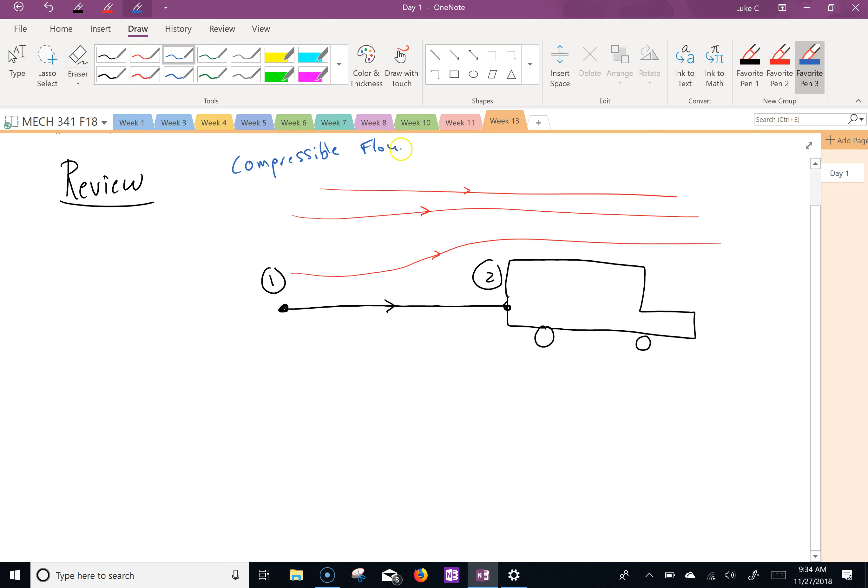Really, you can spend a whole semester on this stuff, but what we talked about, and we can label it over here, was isentropic flow. We talked about converging nozzles, and then converging-diverging nozzles. We'll quickly review all these.

And then we started looking at the shock waves, right? We got the momentum down, but we'll kind of look at those. So these are the basic ideas of compressible flow, and if you understand these, if you ever get more into this field, this is the basics. You can definitely understand everything else.

So we also talked about any type of flow - here's the flow going over a truck. From 1 to 2, the actual flow will actually slow down, and it will eventually approach 0. What are those properties called when they bring a fluid to rest? Do you remember? Stagnation. Stagnation, okay.

So you can have stagnation temperatures, stagnation pressures, densities. The first homework problem is to plot that ratio between the stagnation temperature, T naught, to the upstream temperature. I'll just give you the temperature one. What do we have right here?

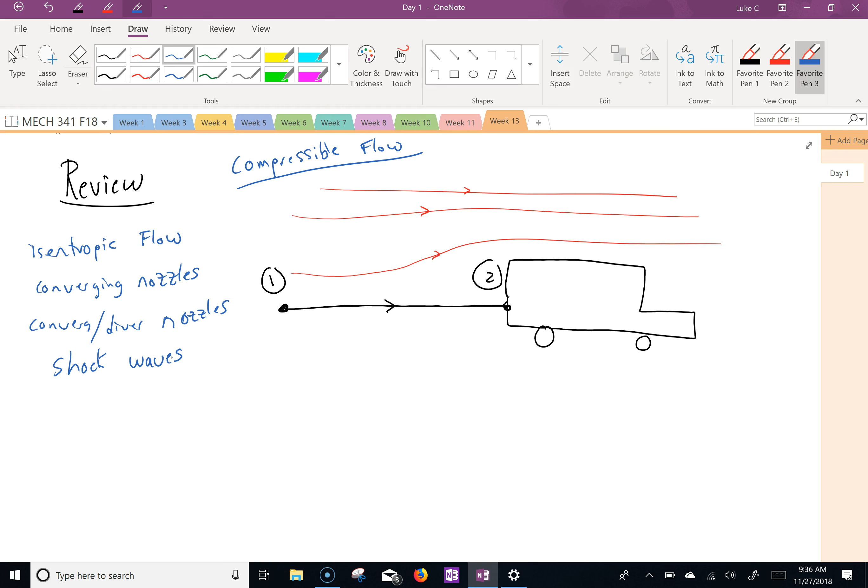So the stagnation temperature was T plus V squared over 2Cp. This is just basic, actually using enthalpy. Remember what enthalpy was? What variable is that? H. Yep, H. So if you remember from thermo, H, or delta H, is Cp delta T. We're using a lot of thermodynamics in this for intermediate - they all kind of mesh together now.

So we use this concept here. If you ever want to know what the temperature rise would be in front of your car, if you put a temperature sensor there and you had a temperature sensor out in the world not moving with it, you would see that the temperature sensor at point 2 would be slightly higher. Because you're bringing that fluid to rest, it's got to do something.

So when an airplane is flying really fast, the front part is going to get really hot. That's a main reason why they have to design these, because you're bringing that fluid to rest, and it's going to increase your temperature, especially if you start going almost Mach, because this number gets really big now, and this temperature difference is going to go up.

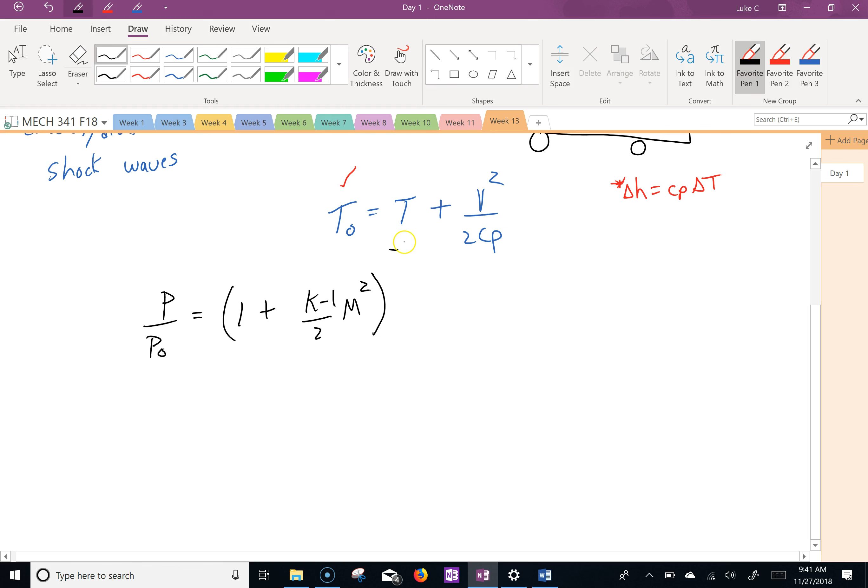One-dimensional isentropic stagnations. Okay, so this is basically what I want you to plot: P over P naught equals 1 plus k minus 1 over 2 times M squared, raised to minus k divided by k minus 1. And the density ratio is 1 plus k minus 1 over 2 times M squared, raised to minus 1 over k minus 1.

Oh, am I recording? Yeah, good. And the temperature one is this one.

And are we using air? Yep. So do you remember what the K value was for air? Do you remember what the equation for K was? You didn't give us these. Did I give you those? Yeah, I don't know. Oh, okay. Okay, that's all right. Good review.

Okay, so go back to K. Remember the number for K or the equation? Did I give you the number in there? For K? Yeah, 1.4. Yeah, 1.4. That number is found in the back of the book. This is for air, and I believe it's CP over CV, if you ever want to know that. I think we did that in thermo. You should have that in your thermo notes. I think Alyssa has it in that over-exaggerated binder that you probably should duct tape.

And you can plot these three right on the same graph, okay? And try using... I think you'll get, I don't know, let's say you have 3 lines. They might do this or something. I don't know what they exactly do.

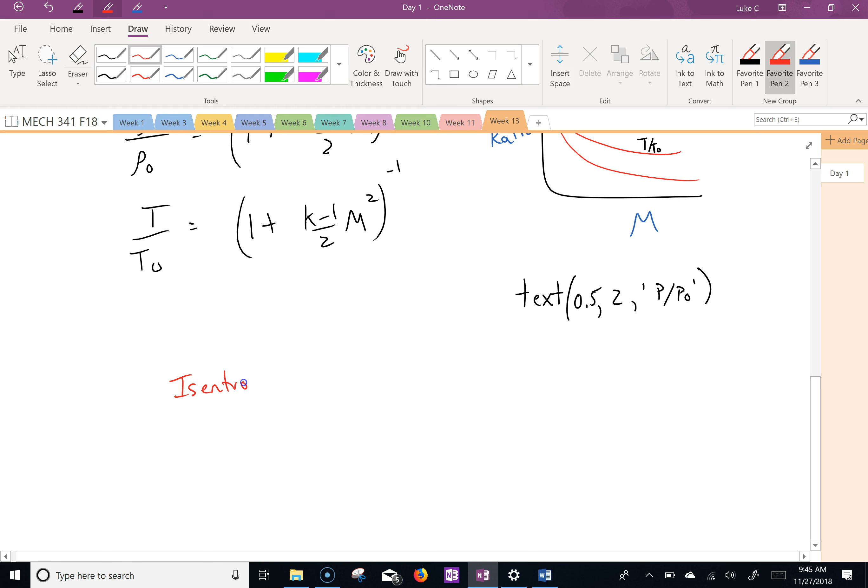Isentropic. So we talked, actually the students in thermo yesterday, see if they remember this. What did we talk about yesterday in thermo? Yes, we did that. After that, we talked about the Carnot cycle.

Entropy. Good job, Will. You weren't there yesterday, but you remember from a year ago. That's good. So entropy. So we looked at Q over T plus S gen. Yes, that's right. Good. Okay.

So this is actually the second law of thermo, an actual equation that states that entropy will always increase. Why? Because everything in the world has some sort of friction or irreversibility that we can't get back. Take a soda can that's hot, put it in a cold room, okay, the heat is going to leave, it's going to go out. We cannot get that heat physically back unless we put it in a mechanical object to cool it. So that's what that means.

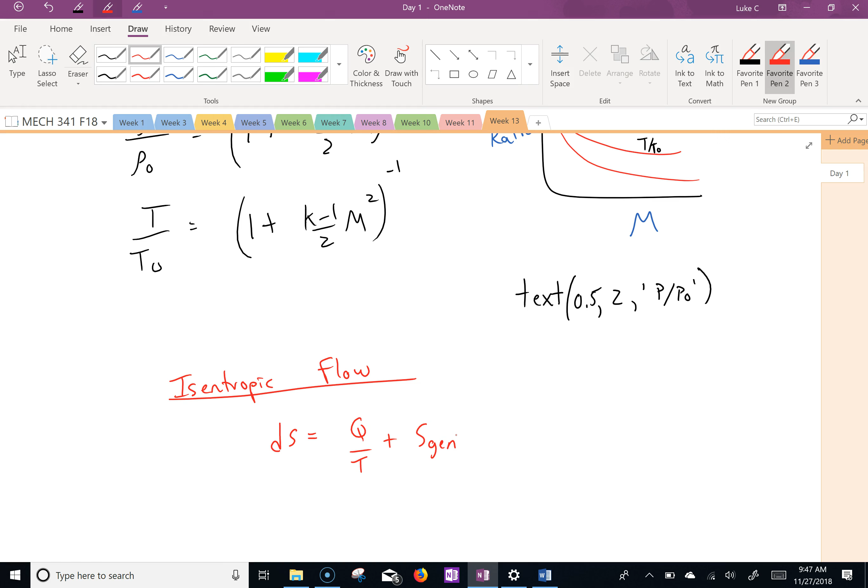But when we deal with isentropic flow, what does delta S equal? Do you remember? Yes. So delta S for isentropic flow is 0. Meaning that this type of flow is an ideal case. We're assuming that we can get that energy back somehow, but we know we can't. But it's just an ideal case, okay?

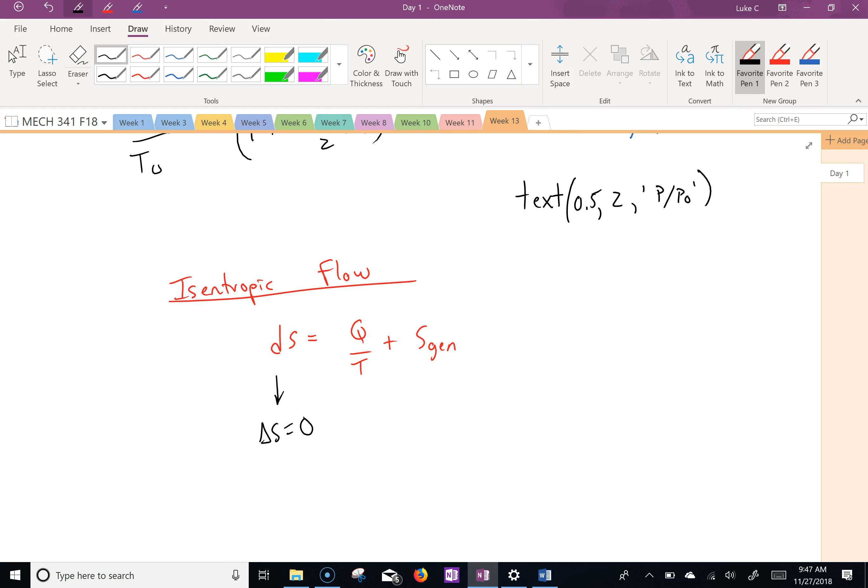So that means this is isentropic flow. It's adiabatic, which means the system is kind of insulated, and reversible.

Now, what does adiabatic mean? It's insulated, meaning no heat transfer through the boundary. But what about the internal energy, delta U? It could do whatever, right? Because think about it, temperature changes inside a fluid duct, if we take that as isentropic flow, is because the internal energy changes, not Q. Remember, Q is heat through the boundary.

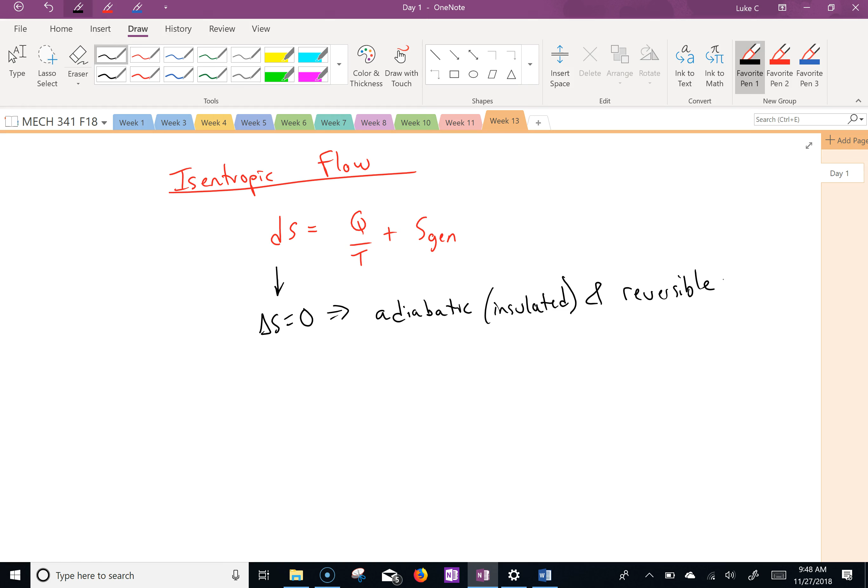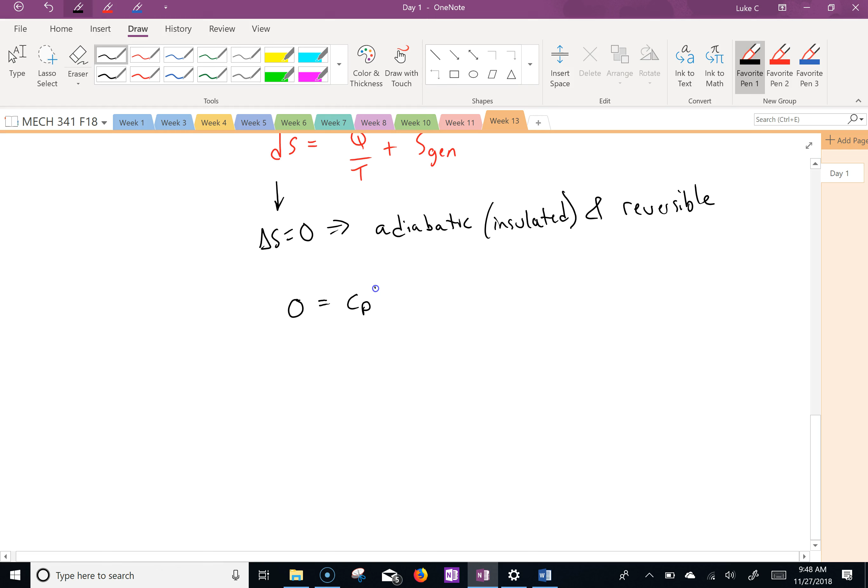So we use isentropic flow, meaning delta S is 0, assuming it's adiabatic and reversible, meaning there's no friction losses, whatever. It's an ideal case. We can do that, and we can actually figure out, I'm just going to give you one equation. We do this in thermo, students have taken thermo, you've done this. There's a whole bunch more algebra I don't want to show you, but I'm going to give you this. You can use this idea to get relationships between temperatures, pressures, densities, you name it.

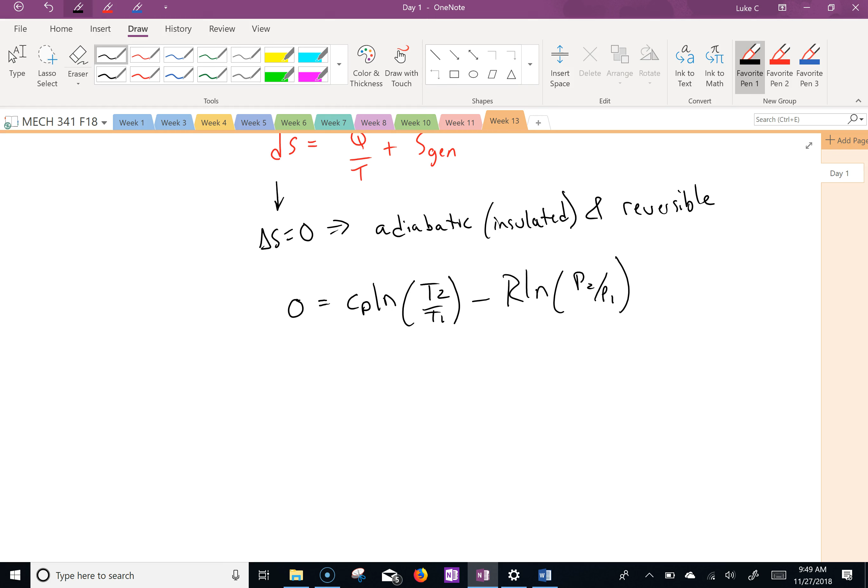So if we have flow in a pipe, and the flow's going that way, it's air, we can figure out what the temperatures and pressures are at any point, if we use isentropic flow.

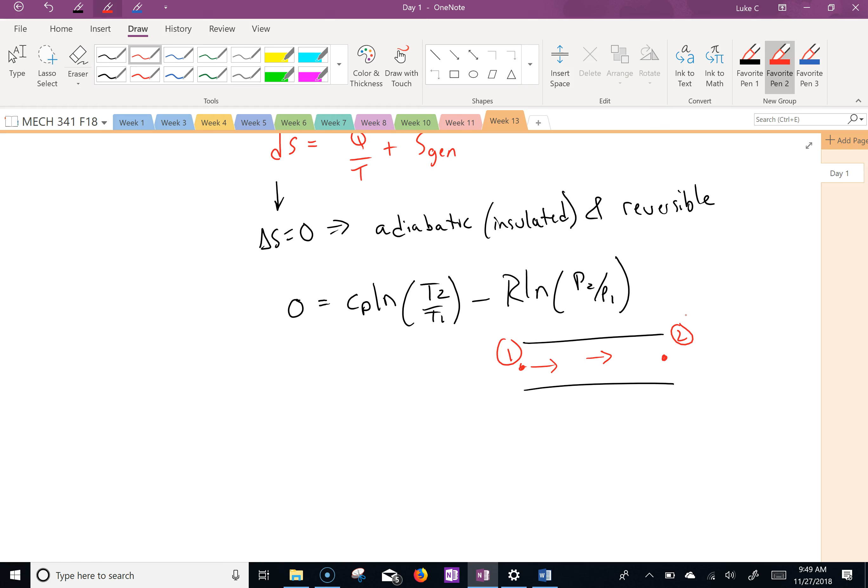So this is a good transition. Now, if we have a pipe and we have somehow magically got a shock wave in here, right here.

What is a shock wave to begin with? It's some abrupt change in density, pressure, temperature that occurs, if you somehow get that. Actually, the easiest way to think about it: if an airplane's flying faster than the speed of sound, you're going to get a shock wave. That shock wave is basically due to, if you think about it, when you have signals being sent out at the speed of sound to let the flow ahead know to move for you, and it's receiving that back at the speed of sound, but if you're going faster than that, it doesn't know what to do. Boom, you get the shock wave.

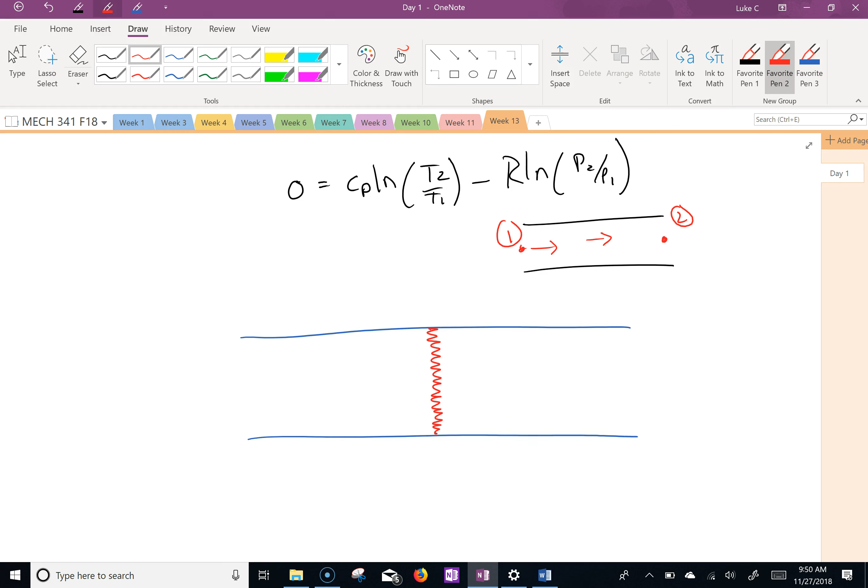So it's weird inside flow because shocks can occur, and it's all based on the back pressure back here. So the flow is actually going left to right here. Depending on this pressure way back here, you can move this shock in this tube wherever you want. It's pretty crazy. So basically you have Mach greater than 1 here, and then it becomes subsonic on the right side. That's how shocks work.

What kind of shock wave is that? Do you remember? Normal, yep, because it's perpendicular, yep.

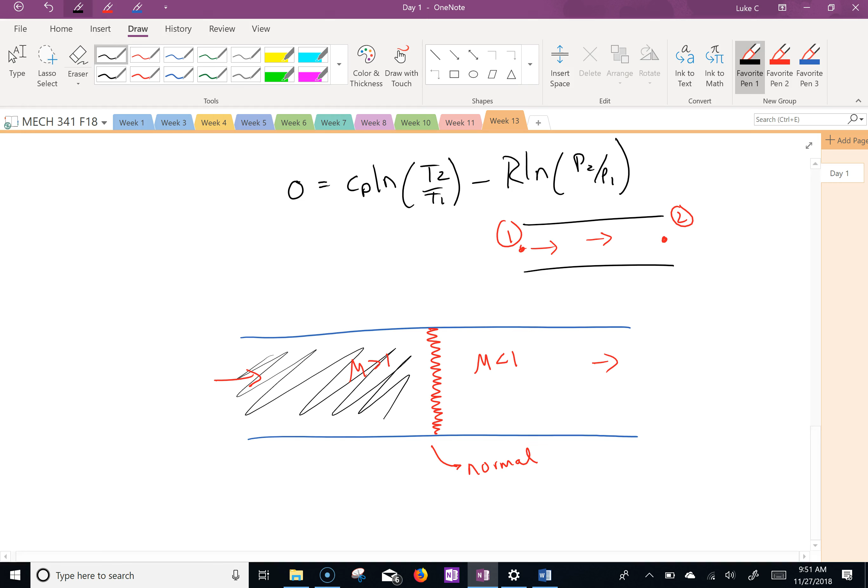What can we assume the flow is in this black region to the left of the shock? Yeah, so we can assume that the flow over here is isentropic. And what about the flow on the right side? You can, still assume isentropic. But you can't do it over the shock because there's an abrupt change. So that's why we use isentropic flow to make our life easier to figure out what's happening up here and what's happening back here.

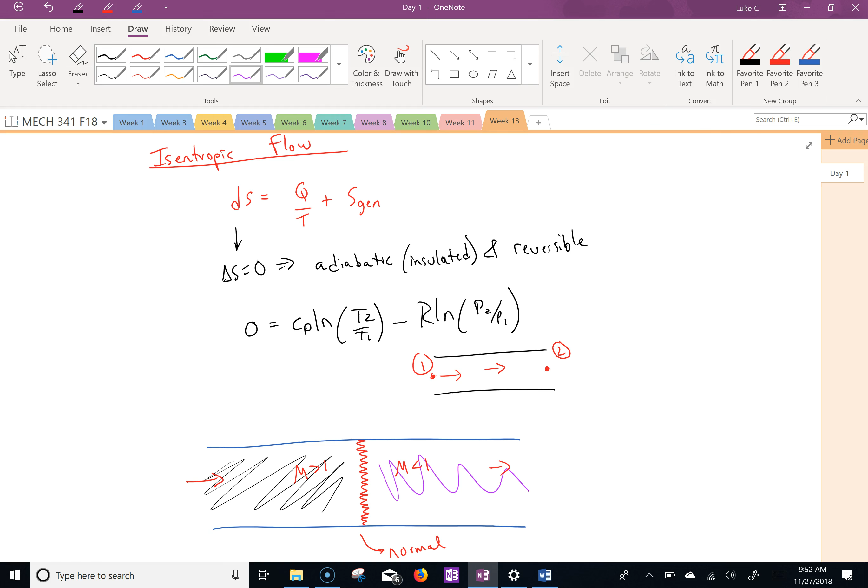So really, anytime you hear flow in air, we usually use isentropic flow. Same thing with gases, we use the ideal gas equation, right? Well, now you're dealing with fluid mechanics, air is moving or a gas is moving. Typically, a lot of the times, we can assume it's isentropic flow. Makes our lives easier.

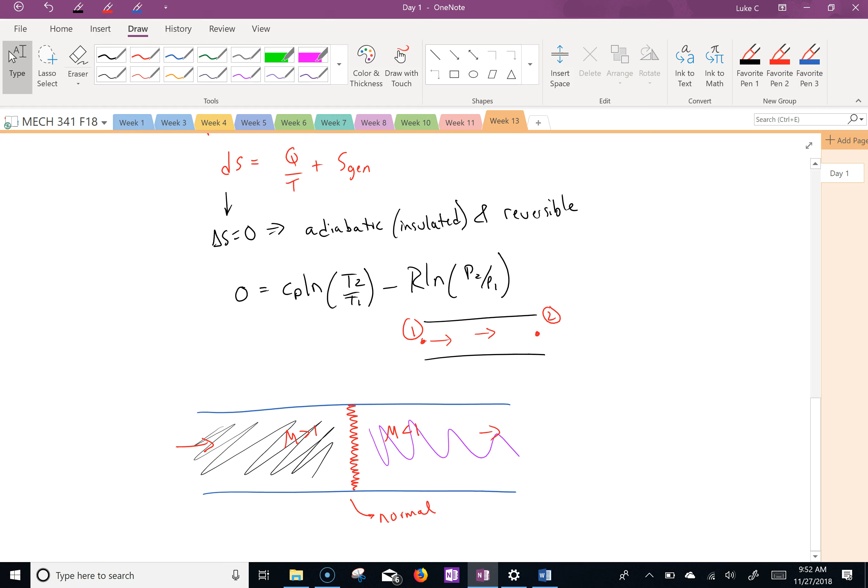Okay, so before I get to the normal shocks, we looked at the converging nozzle. So say we have a pressure back here, we'll call it PB. What's going to happen to this if we keep dropping this pressure? What's going to happen to the flow inside that nozzle? It's going to start increasing, right? It's going to start increasing, and then the max is always going to be right here at the throat, right?

What's the maximum velocity you can get right here at the throat? Mach 1, which is the speed of sound, right. So you can drop this pressure to 0, and you're only going to get Mach 1. Because it goes back to the speed of sound sending out signals, and it can't receive it back fast enough.

So, do you ever see rockets designed like this? Not ones that really want to go fast, right? So what they do is they do a converging, diverging section. Whoops, that's a weird looking one.

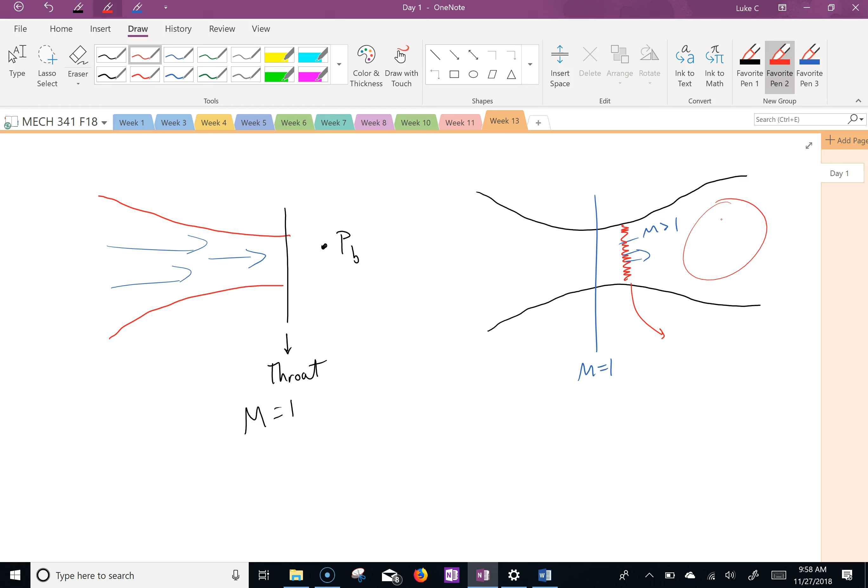Okay. Yeah, I like that. It might be—I'll think about that some more. Thank you, Dan.

Okay, so let's go back to shocks. What we did is we took a control volume approach, right? In order to analyze what happens between upstream and downstream of this, we take a control volume of the shock, and what did we apply? What equations—do you remember?

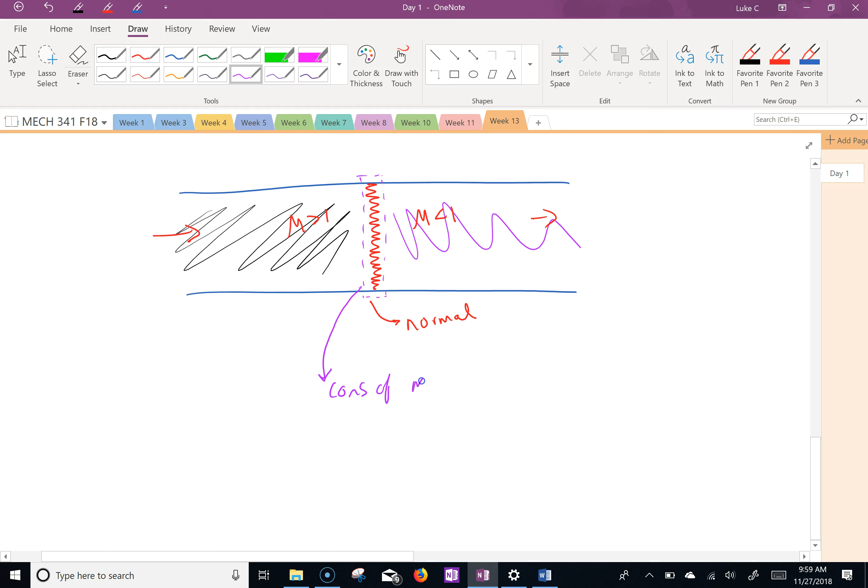What did we do in our paper? Continuity, yep, and momentum—one more that we didn't finish, but we started, maybe. Force. So we did conservation of mass, and we did momentum.

So what does conservation of mass tell us? M dot in equals M dot out. And that's in this control volume, right? So if I have—let's make it brown here—that's coming in, and that goes out. Mass is always conserved no matter what, okay?

What does momentum tell us? What's... M V1? Yes, but what is m times velocity, or m dot times v? What is that, like unit-wise?

Which is? If you have m dot times v, what's that? Force. It's a Newton. So what does momentum tell us?

Forces. So what are the forces acting on this that you had written down? Remember, the sum of m dot out minus m dot in. So you have the force of the fluid pushing in, pressure on this side, and then m dot times v going out and pressure pushing that way. So the forces here are your m dot times velocities and pressures. And we did those two.

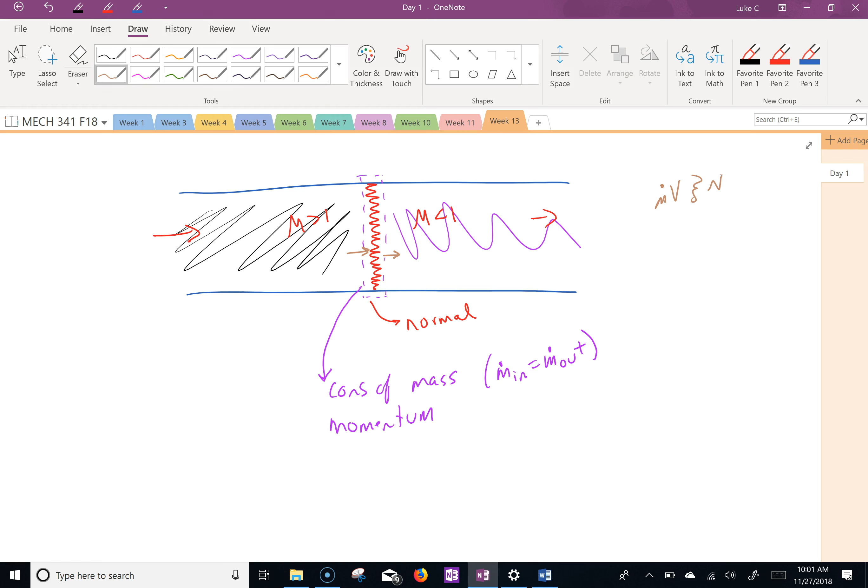So with these two, you can find relationships between velocity and pressure. And what did we have for those equations? Let's write those down.

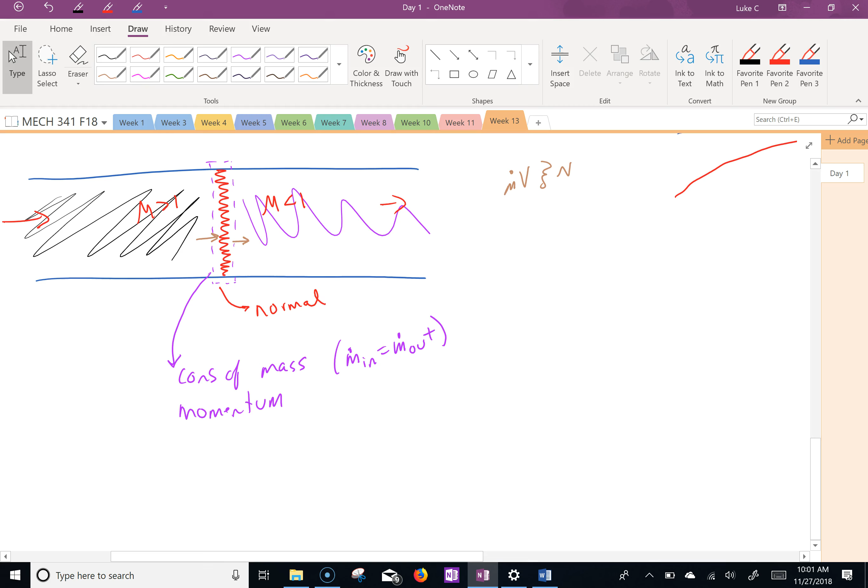So for the conservation of mass, we had rho 1 u1 equals rho 2 u2. I believe, right? Is that what we had in our notes? We actually called what we did in continuity, right?

So what is the continuity equation? What's the difference between that and when I say conservation of mass? It has to deal with u's instead of A's and rho's.

They'll deal with the same thing. But what is the continuity equation that we wrote down? Oh, it's equal to 0. It's still conservation of mass, but in what form? Yes, it's differential form.

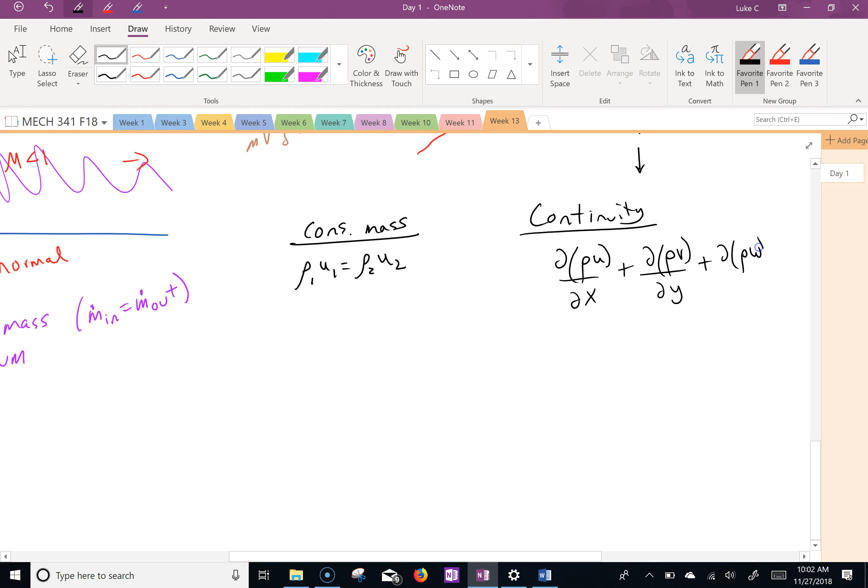And we wrote this down. So when someone says conservation of mass, you got to actually ask them back, what are you talking about? Differential form, or are you talking basic m dot algebraic form? You get the same answer, and we did both. You'll get the same ratio when you do this.

And then momentum. So when you have momentum now, let me write this down. We had what? P1 minus P2 equals rho 1 U1 times U2 minus U1.

What about momentum? What are the two ways you can look at it that we've done in the past? Remember this? We did the, what was the problem? When we started looking at the spigot and the water shooting out, what did we use to solve for the external forces on that?

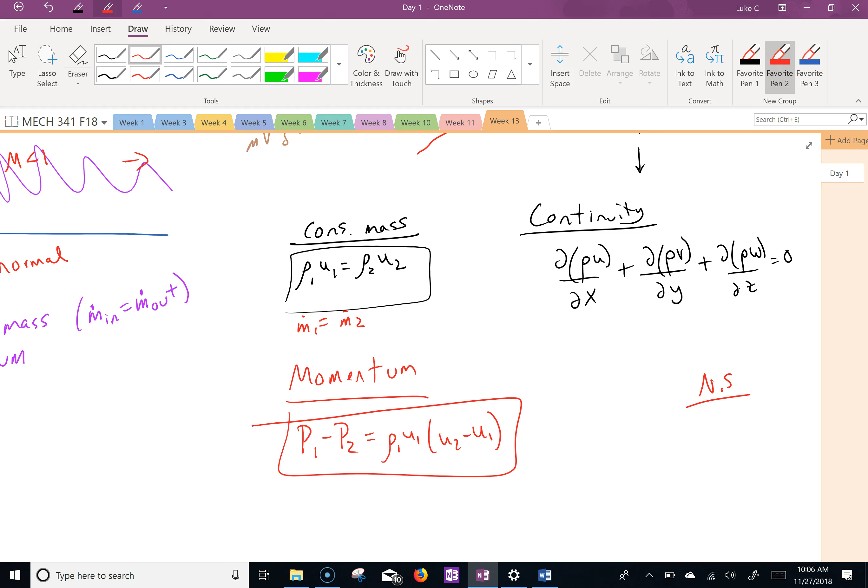And this is where we left off. So, energy.

Isn't it crazy how so much you've learned we can now put together? And you forget so much. Yep, that's why studying for your FE is really good, because then it brings back everything and then it helps you actually in advanced classes too.

So use conservation of mass and momentum to find relationships between pressures, forces, speeds. And the energy, actually, you could use altitudes, velocities, and temperature.

So what can we cancel in this? What can we assume about the control volume for Q? It's the same, just assume adiabatic, so that's gone, zero. There's no change in elevation. And is there any mechanical work? None. Any other object? None.

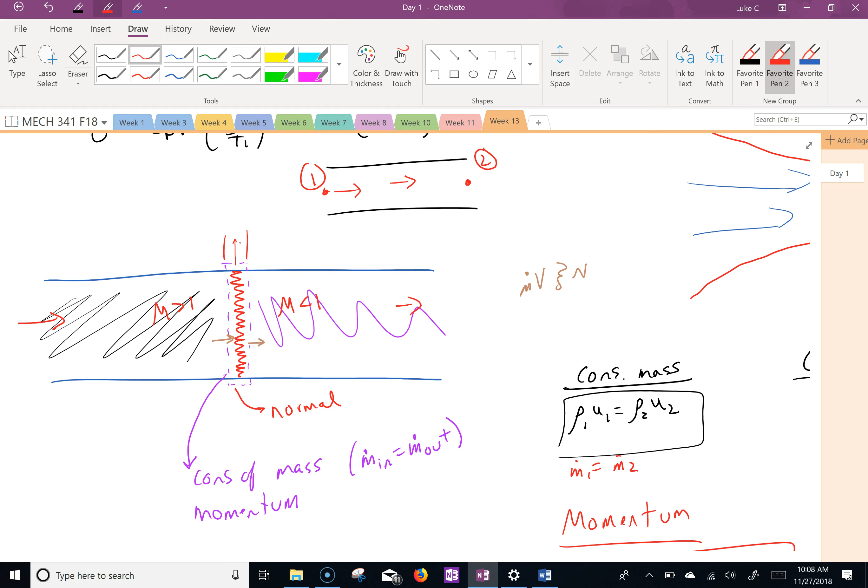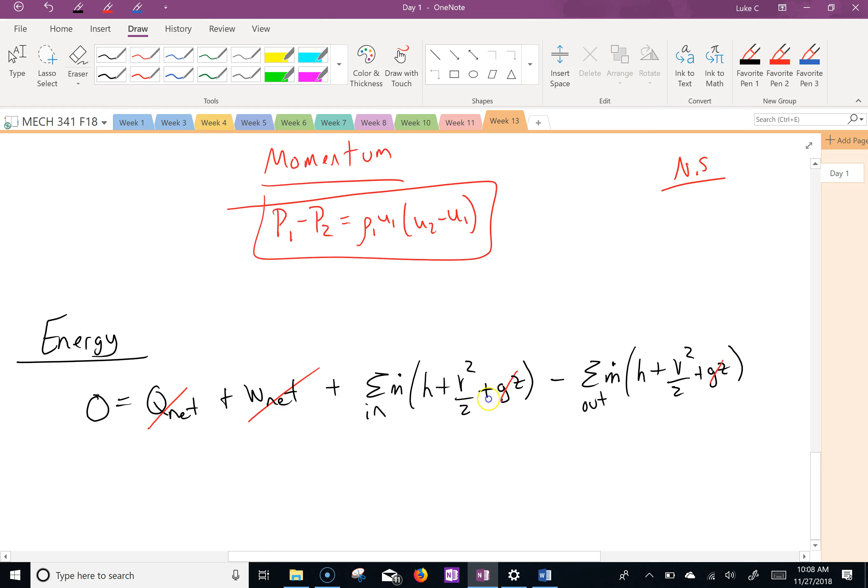Is there ever a case where there is change in elevation? When we're dealing with shocks, no, because we're only looking at one point from here to here. We're assuming that the pressures and the velocities are the same throughout. So I wouldn't even worry about that. The only time you would really worry about that is when you have, most of the time, a mechanical object like a pump, and you need to shoot water up. That's when you most of the time will have to have elevation.

But for our analysis in fluid mechanics, they usually neglect it a lot of the times, and then neglect gravity a lot. So we have H1 plus V1 squared over 2 equals H2 plus V2 squared over 2. Let's just rewrite this: U2 squared minus U1 squared over 2.

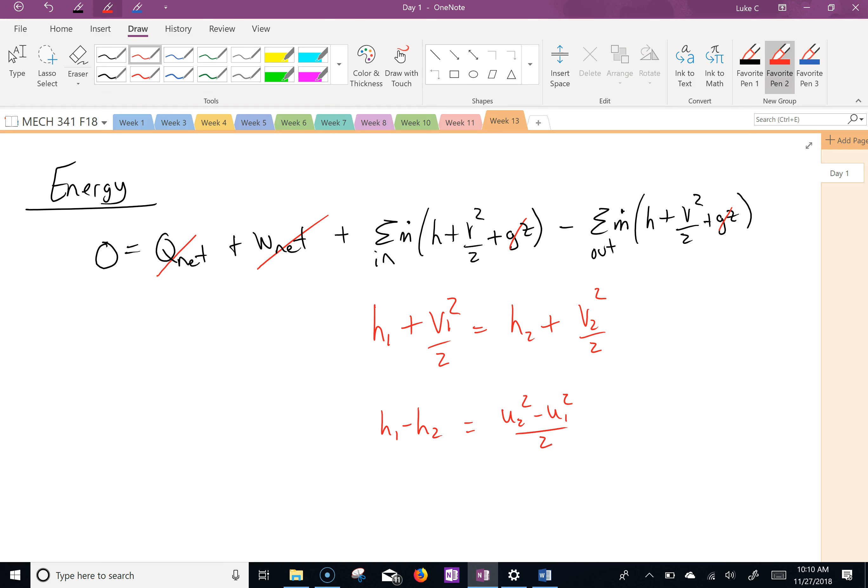So I just brought that to the other side, and what can we call H1 minus H2? And what can you call delta H? CP delta T. See how you can get...

So what does the energy equation relate? Temperatures and velocities.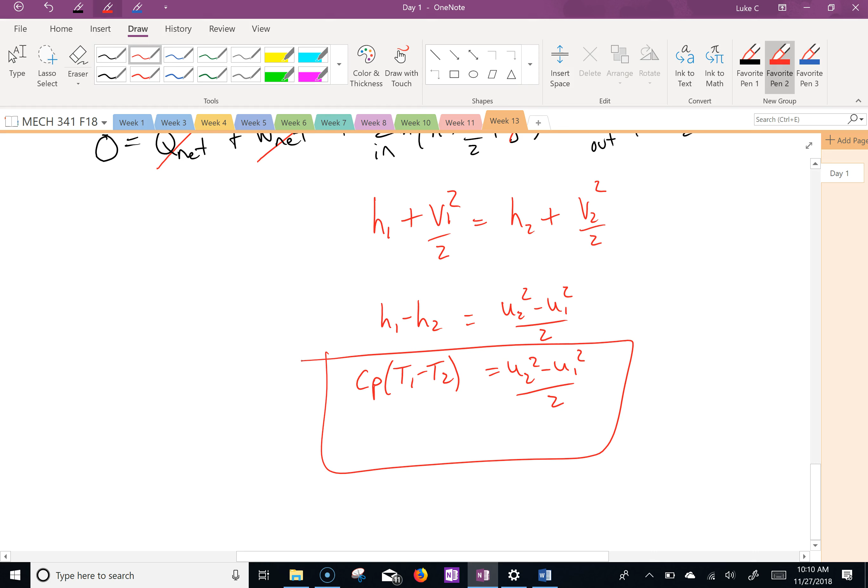So the three equations I boxed—this one with the energy, the momentum, and the conservation of mass—those three, you can do even more algebra to get these equations that are in front of you right now. No, okay, let's not get the right ones.

And it relates with Mach number. Do you remember what the Mach number equation was? Yeah, I don't know if I gave that to you actually. I think you might have talked about it. I don't think you gave it to us, but you definitely talked about it for sure. And what was C? I vaguely remember doing this.

C is the speed of light. No, this is speed of sound. Oh, okay. Square root of K R T.

3 times 10 to the 8th is the speed of sound—times 10 to the 8. I'm sorry, speed of light, I think, yeah. Under normal conditions, the speed of sound is around 343 meters per second at standard temperatures.

But you gotta be careful. I mean, so when an airplane says they're going Mach 0.35, that just tells you how fast, but it doesn't tell you the actual speed, right? Because you got to know the temperature they're flying at in order to find the exact speed. They're flying 30,000 feet up. You know what that temperature is off the top of your head? What do you normally fly at? Like anywhere from 1,000 feet up to like 11,000.

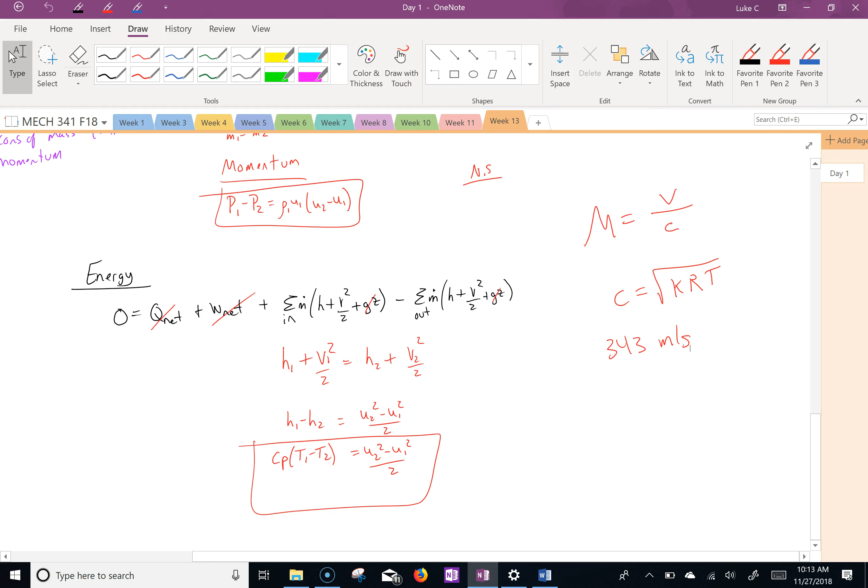Then the last homework problem, well, second to last. How many are there? I think there's 4, one of them is the MATLAB lab, so technically 5. I'm counting 5 because that second part on number 1 also counts as MATLAB.

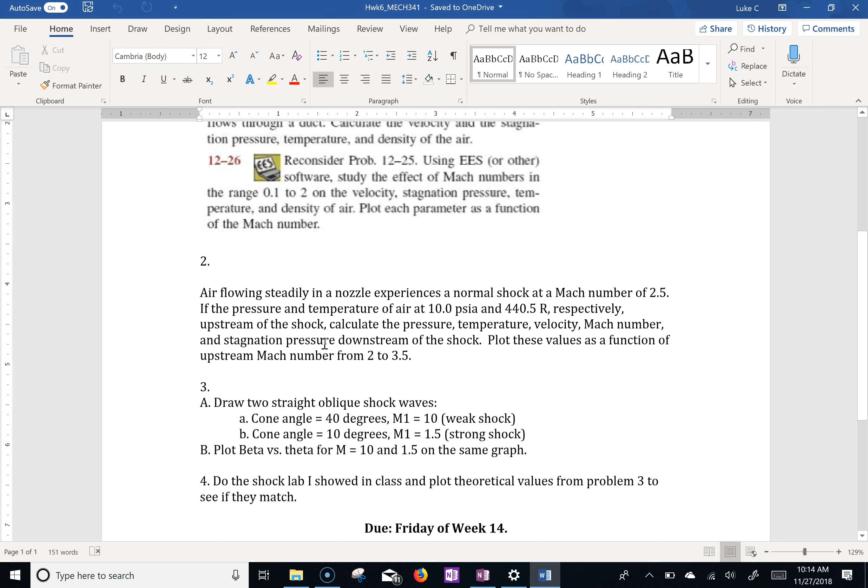You could do all this with graphs. Okay, and anything else you need to give me, like the scripts, so there's more than one MATLAB, there's 4 MATLABs. This one is the lab, remember the lab I showed you? Unzip that file, and the graphs are already done for you, you just have to click the plots if you remember that.

Okay, this is what I want you to do. In this one, I want you to draw 2 straight oblique shock waves, which we haven't talked about yet, but we'll talk about here in a second, at these angles. Then I want you to pick 2 of these lines, Mach 10 and 1.5 on this graph, and plot that. That equation is in your book, and I can write that down for you.

Okay, so let's talk about oblique shocks. Questions so far?

Alrighty, how do you do the homework? Come, we'll go right to the lab on Thursday and I can help you, we can sit in a group. Actually, we want to do the AC lab? And there's, what, 6 computers in there? Yeah, something like that. Does everyone... I have 1 or 2 laptops I can bring in. So how many is it? 3, I can use mine. 6, all right, oh that'd be perfect then.

Anybody else have MATLAB on their laptop? Probably buy it at some point. So bring yours in, just go see Ben. Oh yeah, that's right, got that working. So give me your login username, I will add you to the server list. However you log into the campus, just give me that and I can add you. Remember how we used to have to go to the library to log into the remote server to use the Autodesk? Yeah, they have that, it's the same server, but they're not using it for Autodesk anymore. It just sits there, so they're letting us use it for MATLAB.

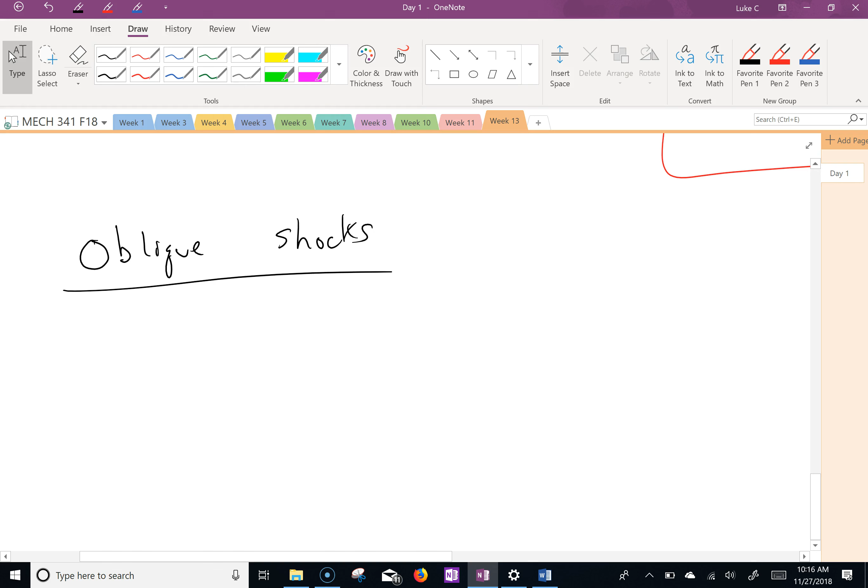Because you're going to need it if you're going to be in FEM and vibrations, you're going to need to know how to do MATLAB again. More MATLAB classes in the college would help, maybe more in depth how-to training. Given how often we use it in our classes, they really should have a little more in depth coverage. It should be like a first year program, then have advanced, and advanced MATLAB should actually be required. Most of industry uses Excel, but knowing how to program and code is a completely different process in your brain that will help you develop critical thinking. That's why I have you guys do some of these for loops and while loops, just to get you to think differently, and it will help in the future.

So, okay, let's look at Mach wave, let's look at oblique shocks, all right? So we have flow going through here.

Come on, I'm trying to delete you. Okay, wow, I cannot delete that. There we go.

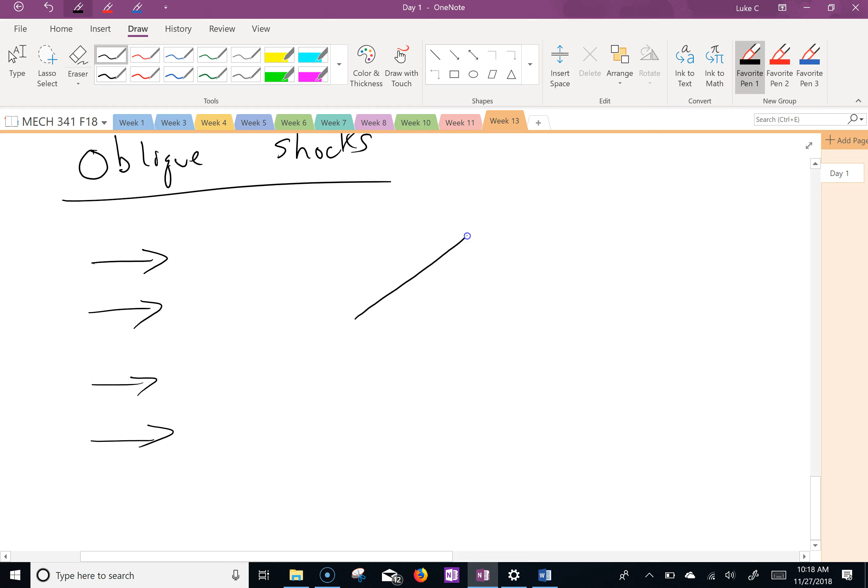So this is a pointed shape, the black lines are walls, okay, and it could be maybe something like this. And flow is going to go, it's actually going to be supersonic, it's going to shoot that way, okay? What you'll get are these shock waves, which are oblique, they're not perpendicular to the surface, okay? And the angle that it makes is beta from the horizontal. So delta is the half angle of the cone.

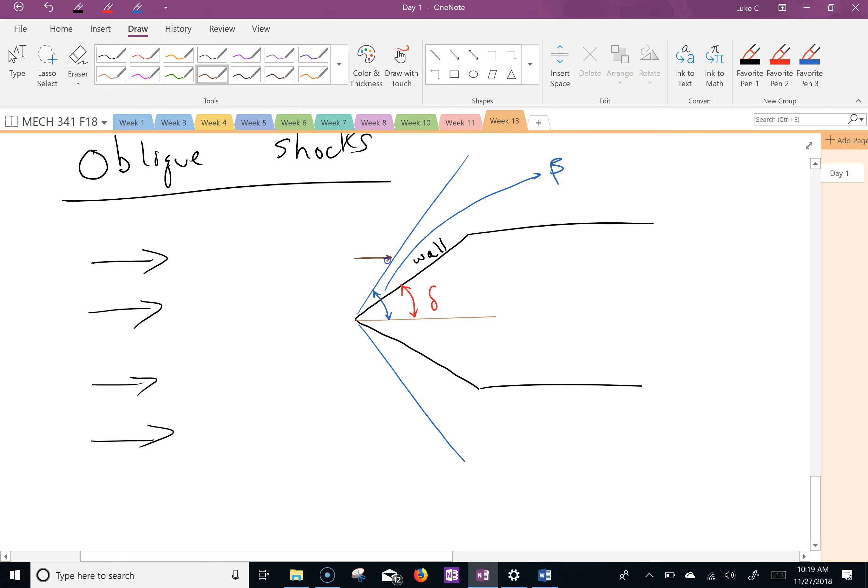So between beta and the blue line, that's M2. Yes, so between the blue shock and the walls now are subsonic speeds, which is M2. And this brown line here, the second one, M2, is actually parallel to this black line, okay?

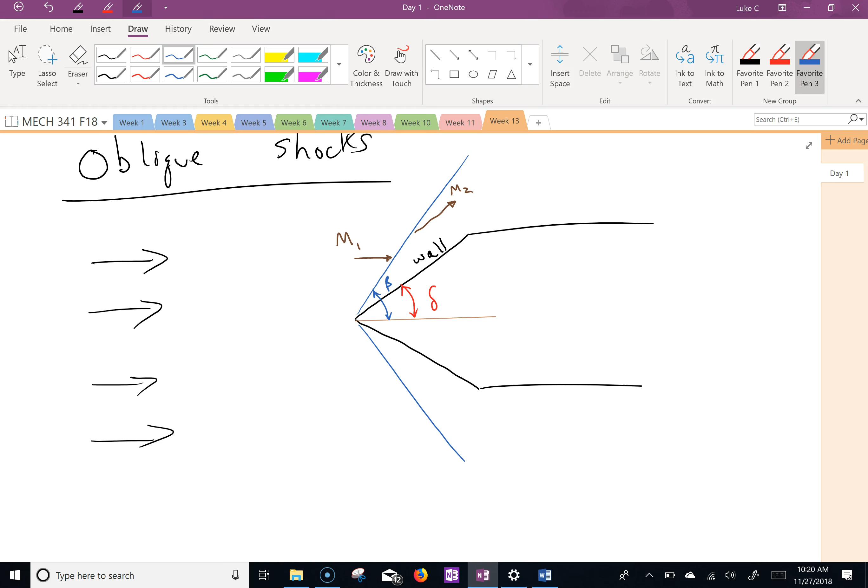So what I'm going to do now is zoom in on that shock. Does everyone have questions? Understand? This is what happens. The faster you go, these angles will get higher, and that's what I wanted to show you in that lab. What is the relationship between Mach number and these angles that are created?

So here's this shock, and here is V1, and here is V2. What I colored brown... so here is, and might as well add, this is your angle beta, just like we had. So I'm going to zoom in.

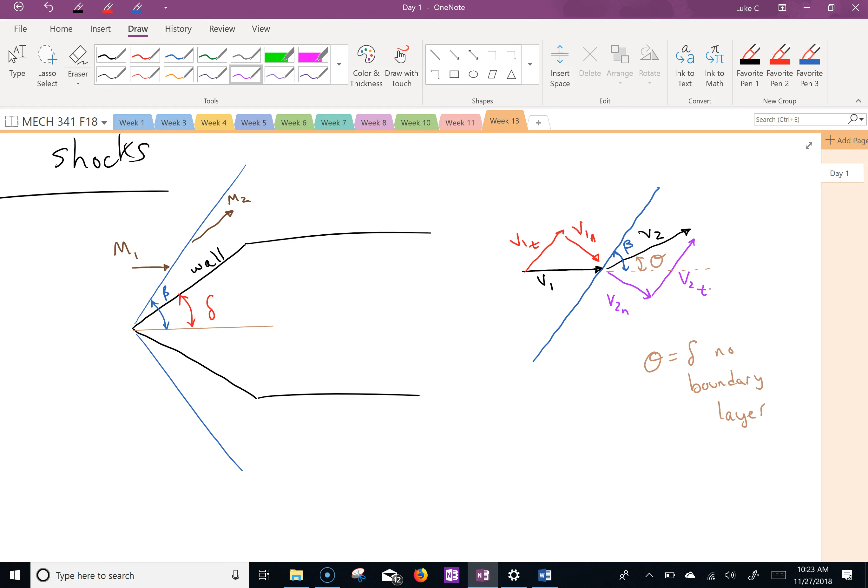Now what does that look like if you look at the normal ones? It's like a normal shock wave, right? Kind of. And that's actually what you use — you just use the normal components of velocities in your equations, okay? So for momentum, we had: P1 minus P2 equals rho 2 U2n squared minus rho 1 U1n squared.

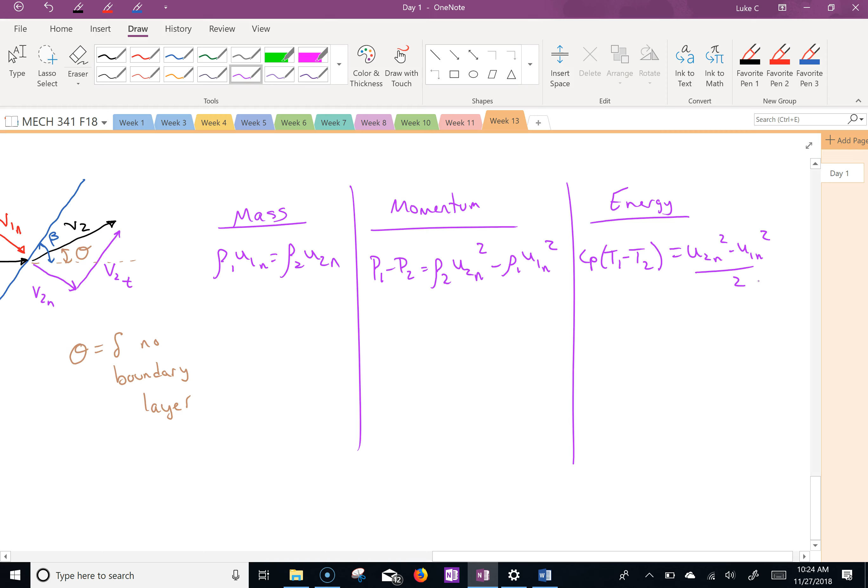And then the energy equation, we had... CP T1 minus T2, like this? Oh sorry, you can write them underneath. What did that equal? U2n squared minus U1n squared over 2. So that's obviously depending on how normal the shock wave is, right? So about the tangent component, I don't even need to worry about those, which is cool, because you only have to worry now about the normal components, since those are the only ones that shoot across the normal shock wave.

And I think I have something in my head that I want to continue on and make sure I say it right. Yeah, okay, that's what I thought. So the tangent components, they never change because they're always parallel to the shock. They don't jump across the shock. So V1T will actually equal V2T, and you can put that in here. Because those values, if you think about it, these normal ones are really the main ones that are jumping across the shock.

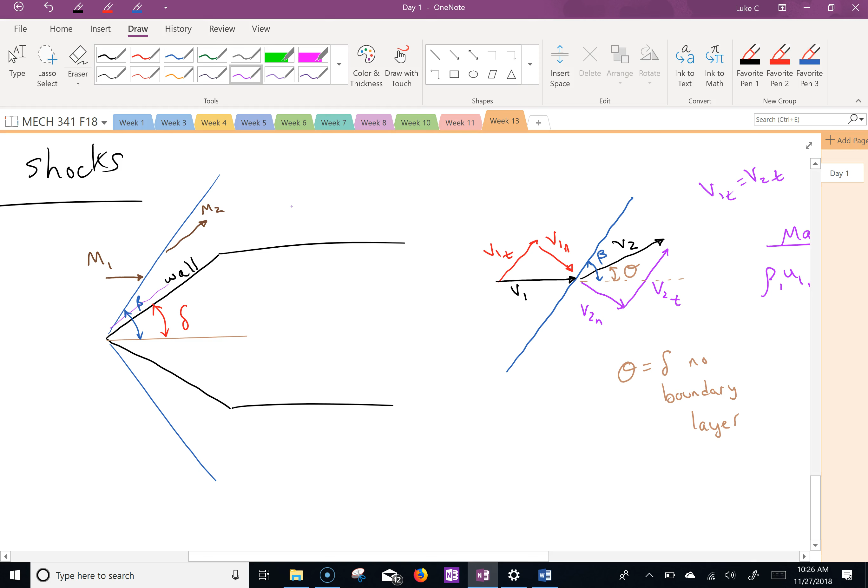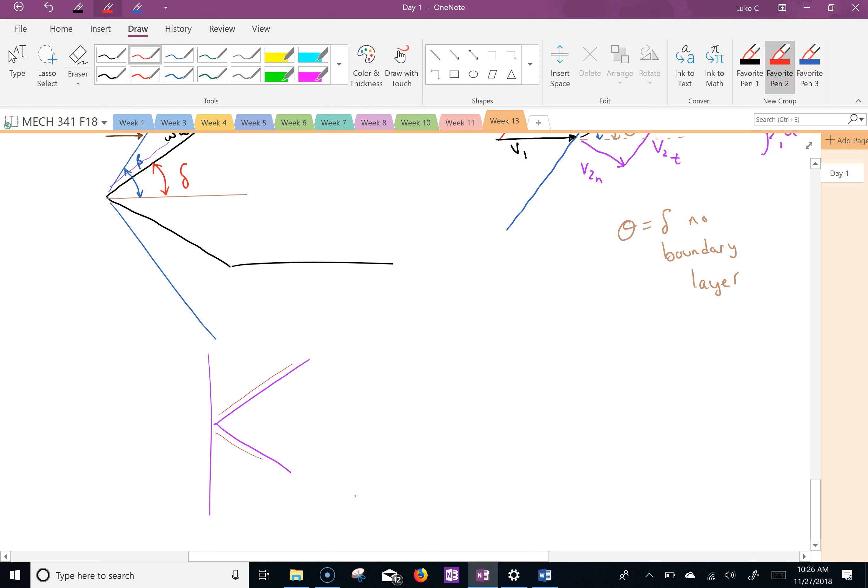At the theoretical extreme low, when you look at the whole diagram, you said the shock waves continue to become more oblique as it gets faster. So obviously that would put it at its extreme. Oh, at a normal shock — perpendicular, yes. Right, or, I mean parallel. So that would be, it's not existing now. I don't, you know what I mean? It just seems... you mean this shock wave will keep going like this. So at low speeds you'll get like a normal shock. At higher speeds it'll keep going, it'll kind of almost be parallel to that. Yep, yep.

Okay, so we have these, and really those equations you have here, all you have to do is replace M1 with M1N, which is M1 sine beta, and M2 with M2N, which is M2 sine (beta minus theta). So you just have to use the n components in these equations for oblique shocks, and you can figure out what those velocities are.

Oh, it's 10:30 already? Holy smokes.